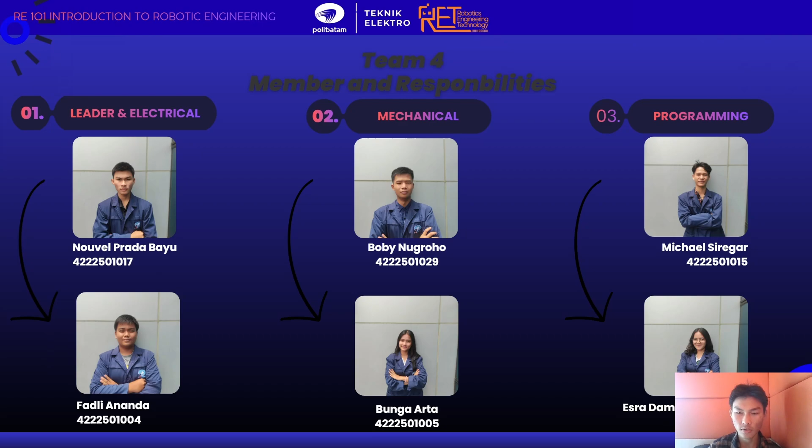Next, the problem statement. So, what's the engineering role? Engineers apply knowledge of mechanics, electronics, and programming to design a robotics system capable of performing repetitive tasks autonomously.

While ensuring safety and reliability, the problem is that equipment workers at Polytechnic Batam are overwhelmed moving a large number of heavy tables and chairs. Moving heavy furniture like tables and chairs requires effort and consumes a lot of the worker's time. The impact is these tasks can cause fatigue or even serious injury.

A successful solution would be creating a chair and table transport robot for a long-term solution and improving the quality of human life.

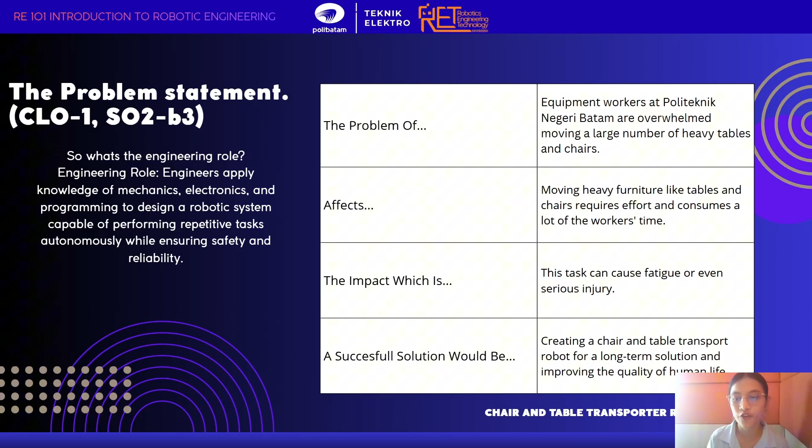System requirement review. A system requirement review, or SRR, is a formal review process that confirms requirements are clearly defined, complete, consistent, and achievable before proceeding to the initial design phase.

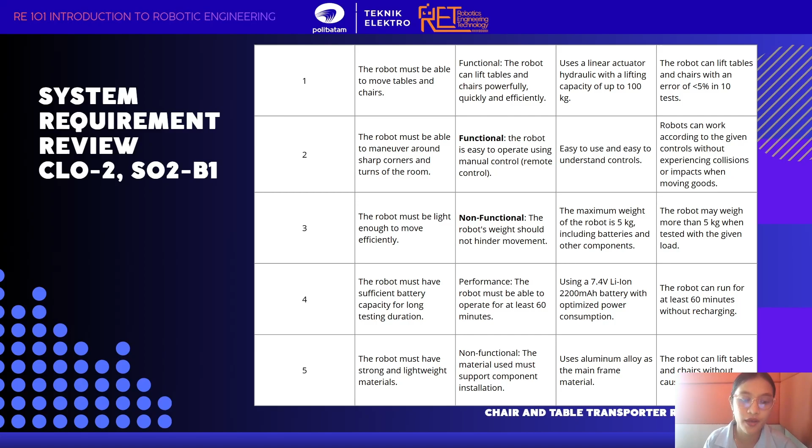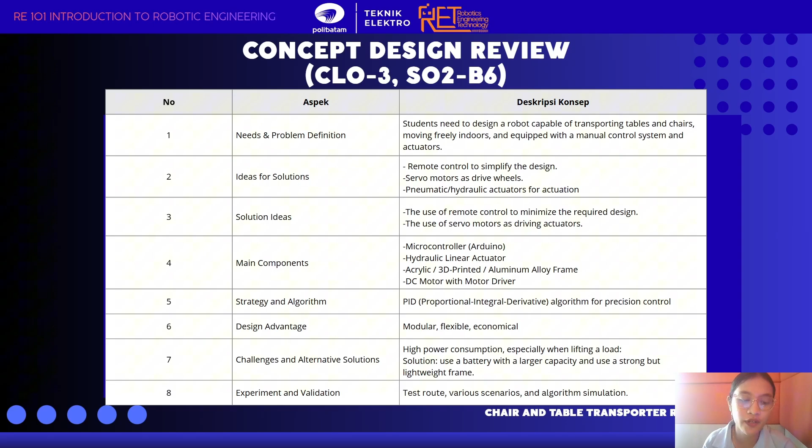Okay, the next is concept design review. A concept design review is an early informal evaluation to assess a project's fundamental design direction before significant resources are invested. Okay, next, preliminary design review.

The chair and table transporter robot is an IoT-based system designed to lift up to 100 kilograms using a hydraulic-powered scissor lift mechanism, featuring a lightweight frame made of aluminum alloy, acrylic, and PVC, and controlled via an ESP8266 NodeMCU with a battery life of at least 60 minutes.

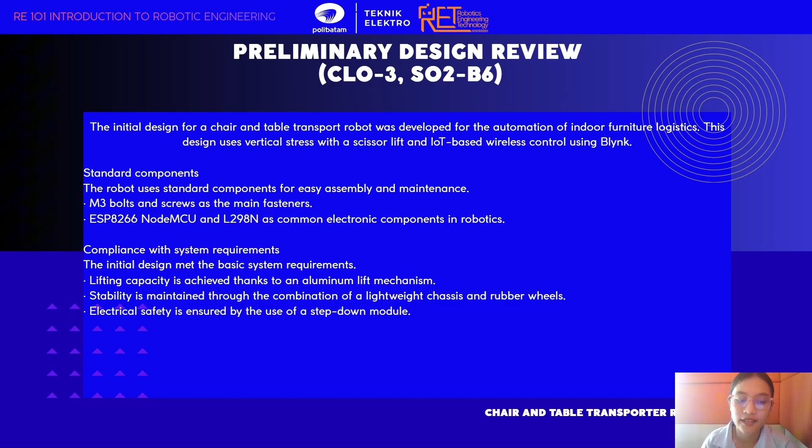Okay, so in the next slide, this is a critical design review. The mechanism we use in our robot is a scissor lift, and the control uses NodeMCU 1.0 ESP8266. Here is an in-depth technical overview based on the list of components and materials used.

The first one is the technical aspect overview: system integration and fabrication. We use a control system like NodeMCU ESP8266.

The use of ESP8266 allows the robot to be controlled via Wi-Fi, which is very efficient for remote indoor operation, such as moving chairs in the hall. Lifter system.

We use a micro servo, MG90S. The servo drives the scissor-lift mechanism because the MG90S has a metal gear, giving it better resistance to torque and loads when lifting the acrylic platform.

Motion system: we use motor driver L298 and a gear motor. The motor driver controls two yellow hobby gear motors for the robot's mobility. The use of rubber wheels ensures good traction on the building floor.

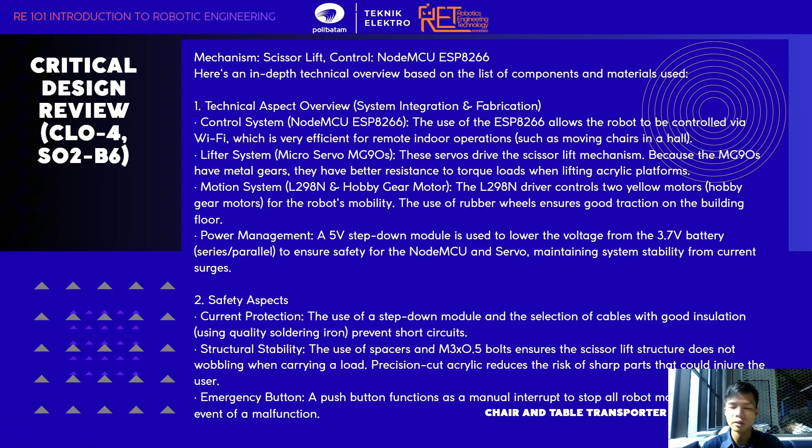The third is the quality aspect: material durability and body rigidity. For material durability, the combination of aluminum for the lifting arm and acrylic for the main body provides a balance between structural strength and aesthetics. Aluminum was chosen for the support points because it is more resistant to friction than plastic. For body rigidity, M3 bolts and screws provide better bonding strength to plastic and PVC components than glue, making the robot more durable for repeated use.

The fourth is time efficiency: ease of assembly and modular components. Using a breadboard during prototyping speeds up circuit troubleshooting before soldering. Components such as the motor driver and NodeMCU are plug and play, speeding up control system integration.

Number five is cost aspect. The following parts and components are required according to the budget provided by Warung BHP.

So the next slide is the draft design document and final design. This is the engineering drawing of our robot, including point of view, etiquette, and robot illustration when lifting a chair and table.

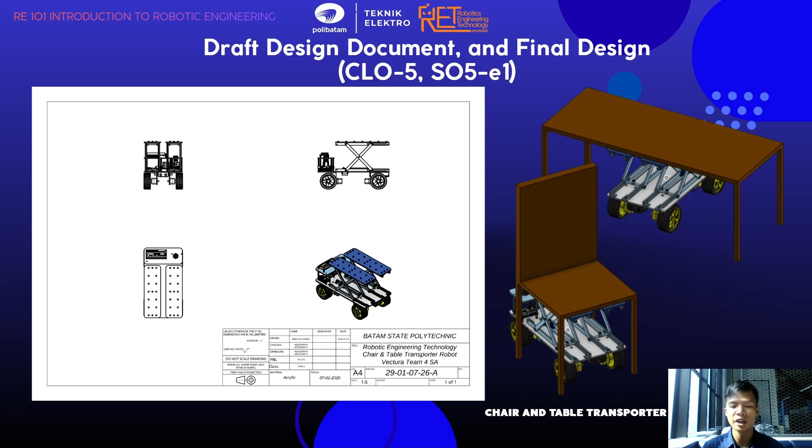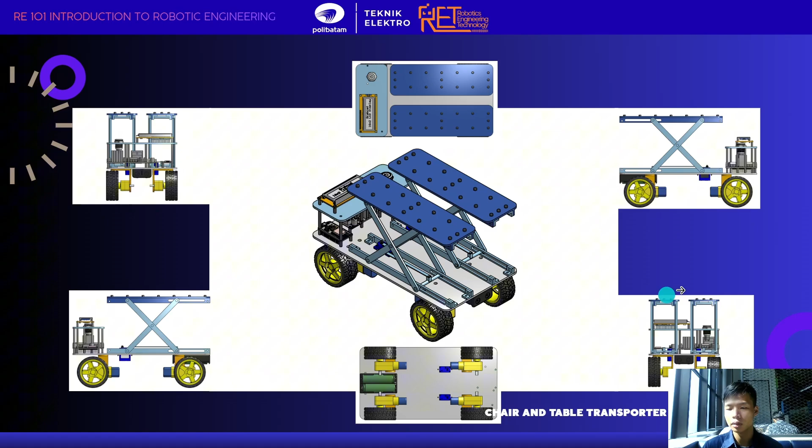So this is the robot's point of view: top view, bottom view, left view, right view, behind view, and front view, left view and right view. And the center view is the isometric view.

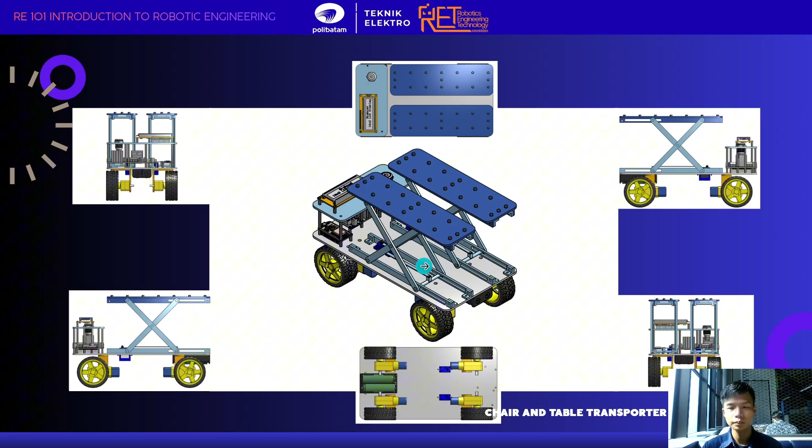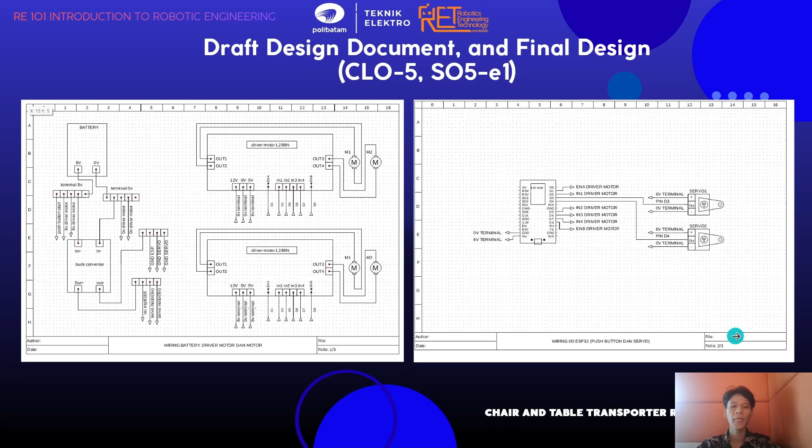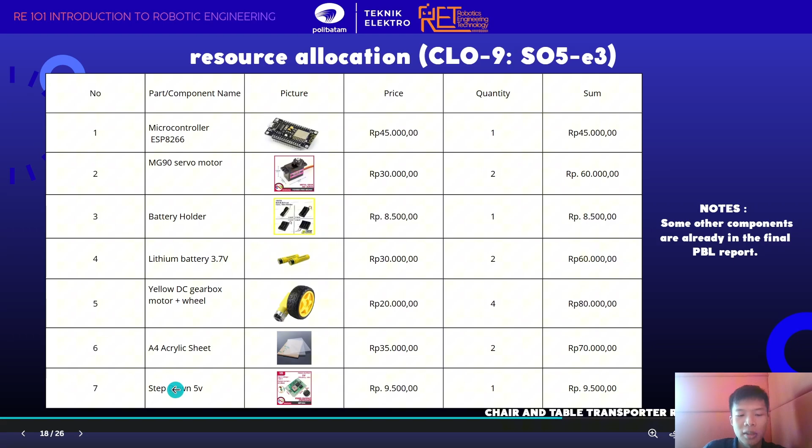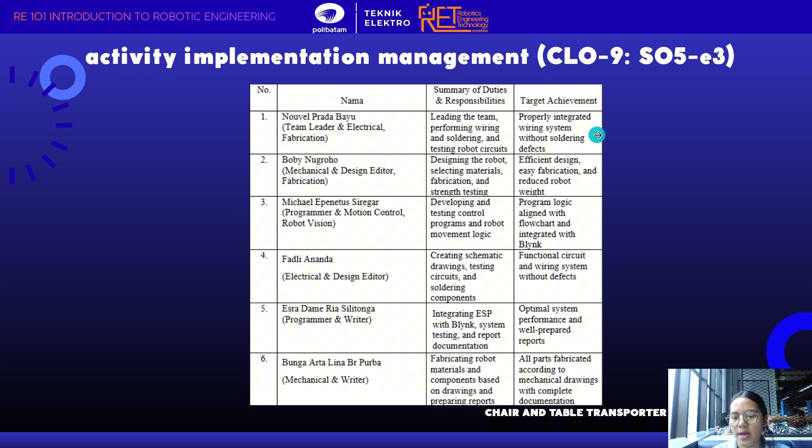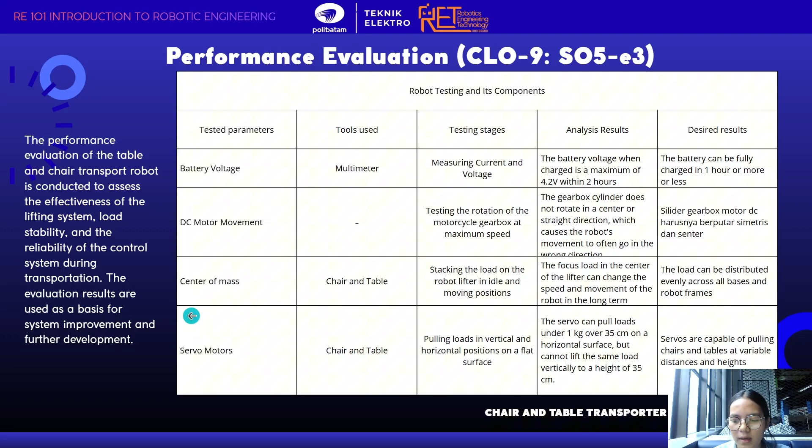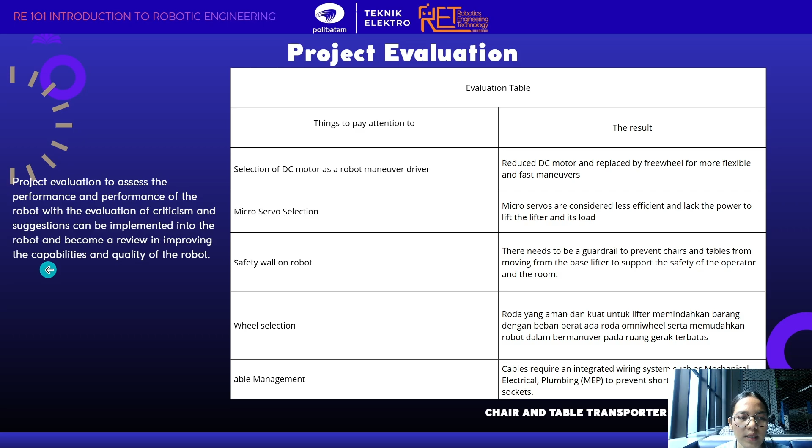Alright, we can see it in the following table. This table contains the project evaluation to assess the performance of the robot, with the evaluation of criticism and suggestion that can be implemented into the robot and become a review in improving the capabilities and quality of the robot.

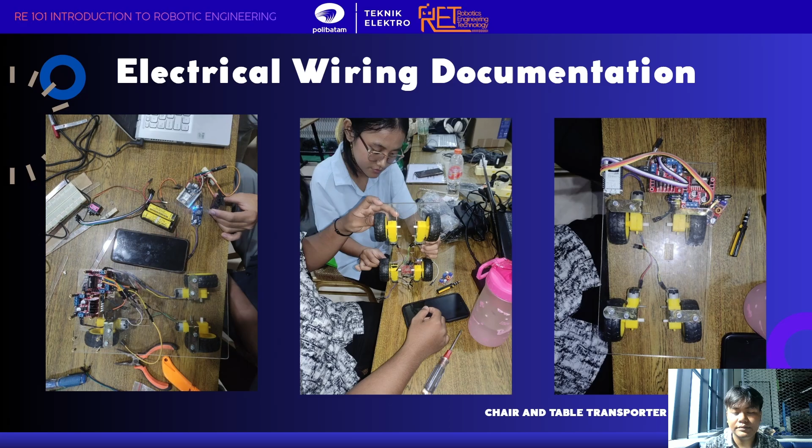This is a documentation of assembling the electronic and electrical components in our robot. The next step is fabrication documentation, where we drill, cut, tape, and assemble the robot.

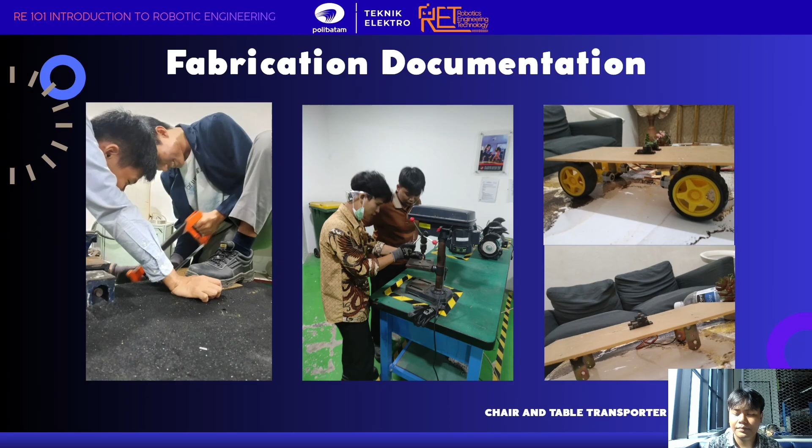The next step is program development documentation, where we complete, assemble, and integrate the program into Blynk.

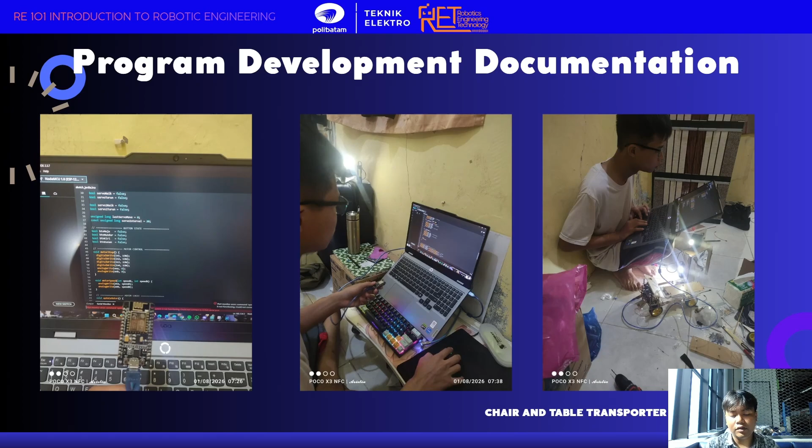The conclusion: a chair and table transport robot is a product designed to assist in the automatic and efficient transportation of chairs and tables. The goal of this design is to simplify the transportation of chairs and tables within the Batam State Polytechnic campus, such as in the auditorium.

And to prevent injuries from manual transportation, the lifting system is controlled by a servo motor to regulate the release and closure of the scissors.